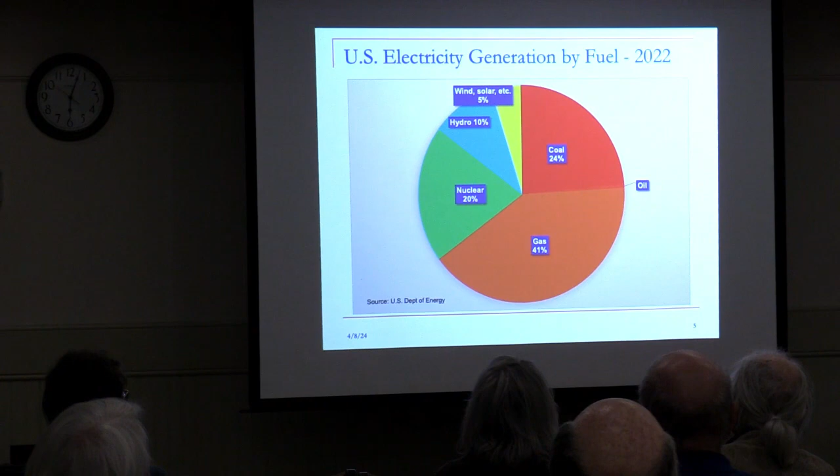First, how do we generate our electricity today? This is how. 24% of our electricity is from coal, 41% natural gas, a tiny fraction from oil. So fossil fuels are still the majority of our generation. It's down about 3% in the past 10 years or so, and renewables are up a couple of percent, with hydro, as is usually the case, being the leading renewable, and wind and solar, so that totals 15%, and nuclear is steady at 20%.

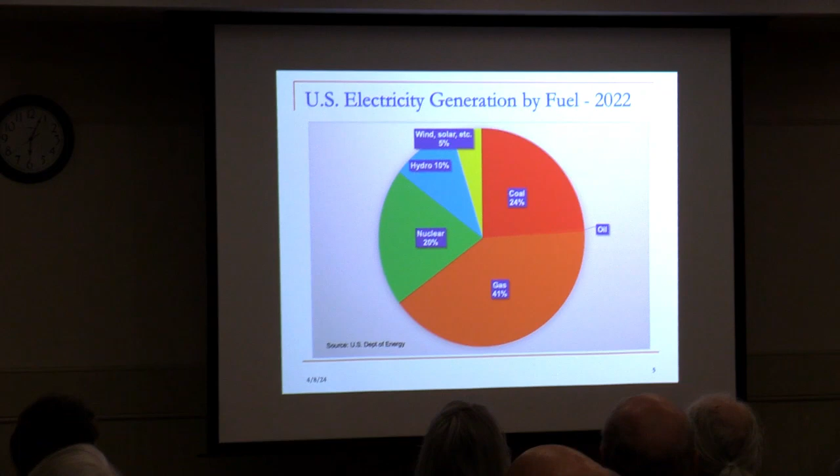So there hasn't been much change except a large movement from coal to natural gas over the past 10, 15 years, which is good for the environment. Not necessarily done for that reason, by the way. Natural gas powered power plants are cheaper and easier to build, and natural gas has been declining in price for some time, but it's still good for the environment.

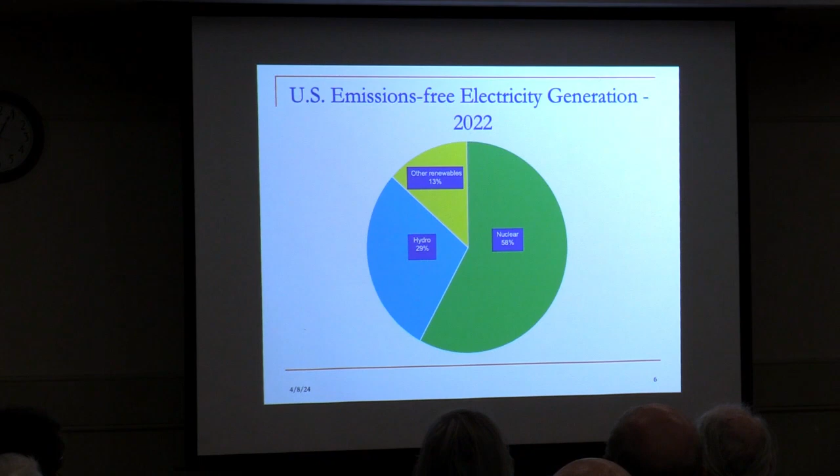Of the ones that we just looked at, these are the ones contributing to emissions-free electricity, which is what we're interested in from the standpoint of mitigating global heating. I don't call it warming because it's really heating. Most of our emissions-free electricity is from nuclear power, 58%. And then you see the other numbers there: hydro, 29%, and the other renewables, 13%.

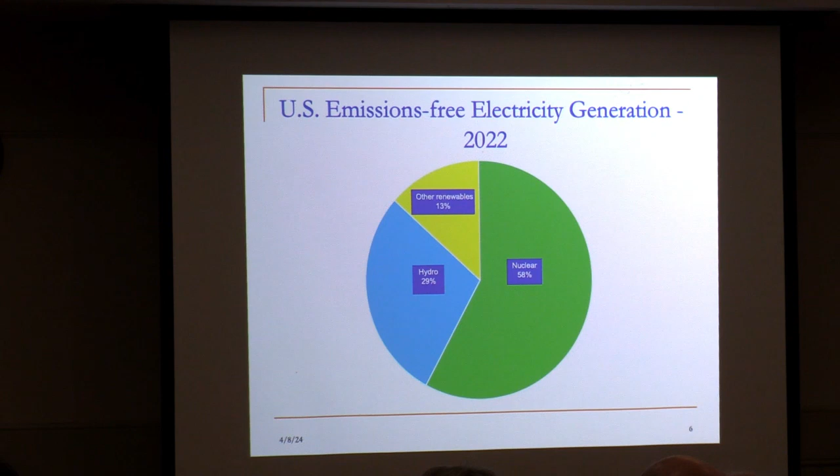That's something you need to keep in mind when we talk about nuclear power. You throw away nuclear power, you throw away the biggest source of emissions-free electricity.

We have put 2 new nuclear plants on of the advanced passively safe types in the past 2 years, but none are planned that I'm aware of.

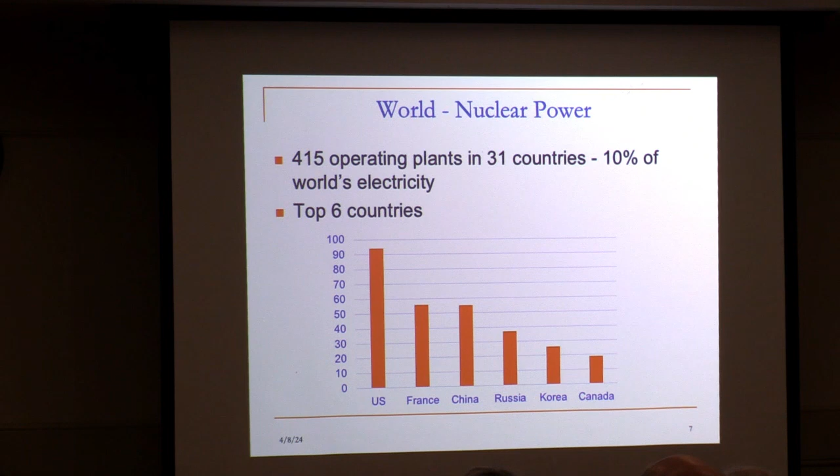So why should we consider nuclear? My main reason is because it's the brightest hope for mitigating the electrical generation emissions that contribute to climate change.

In my view, and I've been involved in this for the past 15, 20 years, informally, global heating is an existential threat. And I don't mean an existential threat through the re-election of politicians. I mean, really, it's a problem.

There was an article in the paper last year, I think, that pointed out that 4 of the 5 planetary extinctions of all life were caused by global heating. In that case, it was the emissions from volcanoes which caused the heating, and when that happens, various chemical reactions happen, and the seawater becomes saturated with sulfur dioxide instead of oxygen, and it all goes downhill for those of us who are there.

So that isn't anywhere near, but all of those extinctions happened after the CO2 level reached 900 parts per million. It's currently over 400, and at the rate it's rising, it'll be less than 200 years to reach 900. Doesn't mean we'll have a planetary extinction, but it does mean it's more serious than probably most people have realized.

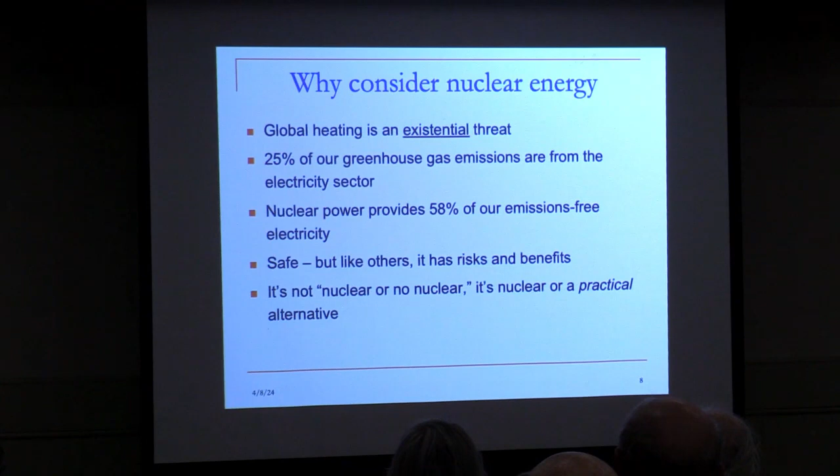One thing to keep in mind, it's not nuclear or no nuclear. No nukes is a choice. It doesn't just stop there. What do you use?

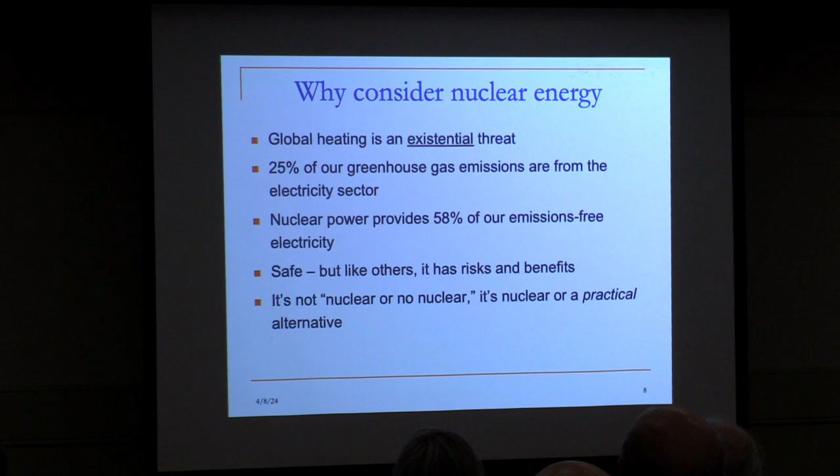Here is the start of the safety argument. Hope you can read this, but let me bring it down.

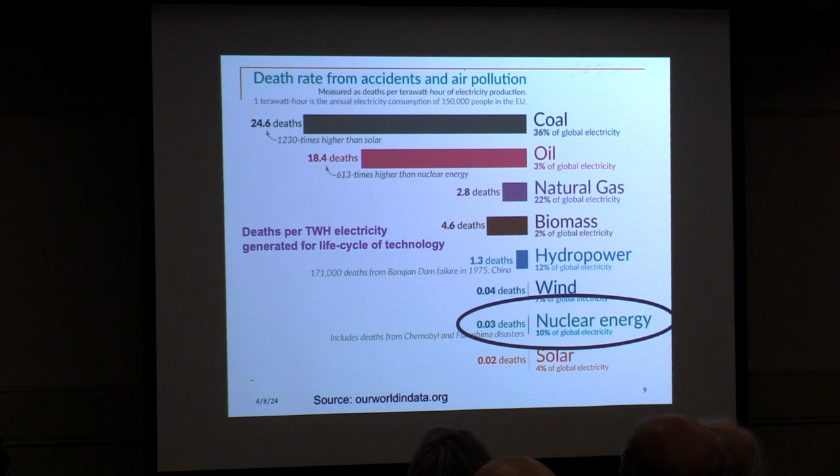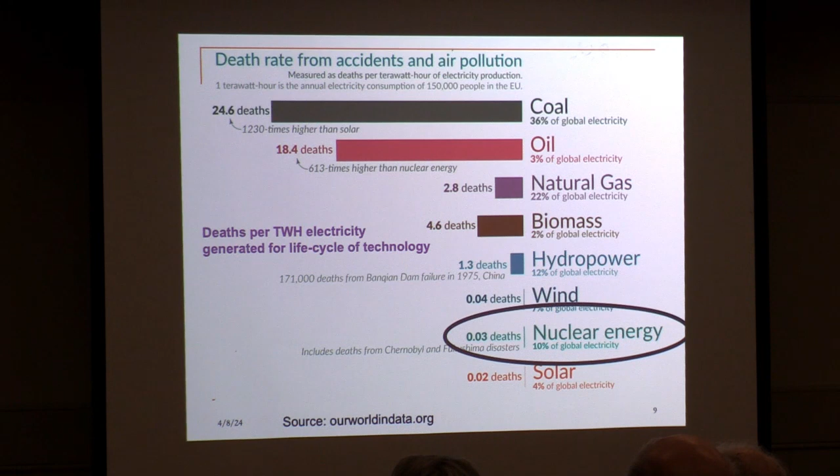This is a EU study that determined the death rate from accidents and air pollution for the whole fuel cycle, from mining through operation of these various technologies. No surprise, coal is the most dangerous at 24.6 deaths per terawatt hour, that's 1 billion kilowatt hours generated, which is the annual electricity consumption of 150,000 people in the EU. That's how they chose to measure this.

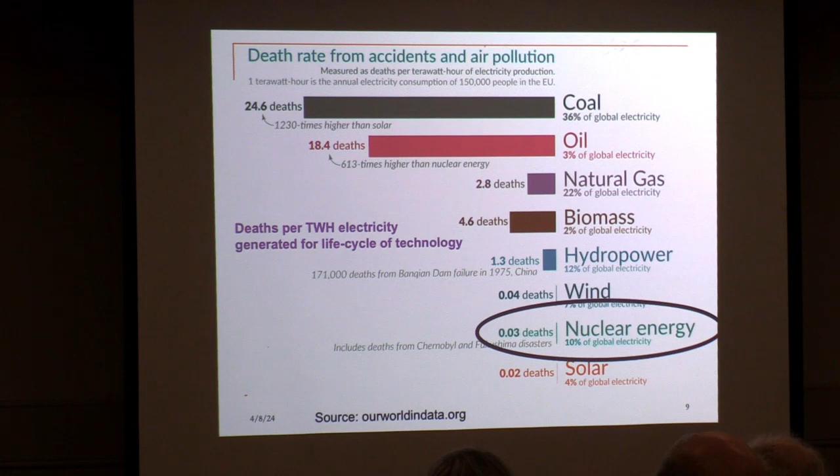Oil also up there, natural gas is much lower. Hydropower, wind, nuclear, and solar are in the category of emissions free, and of those, wind, nuclear, and solar are very close and minuscule in impact.

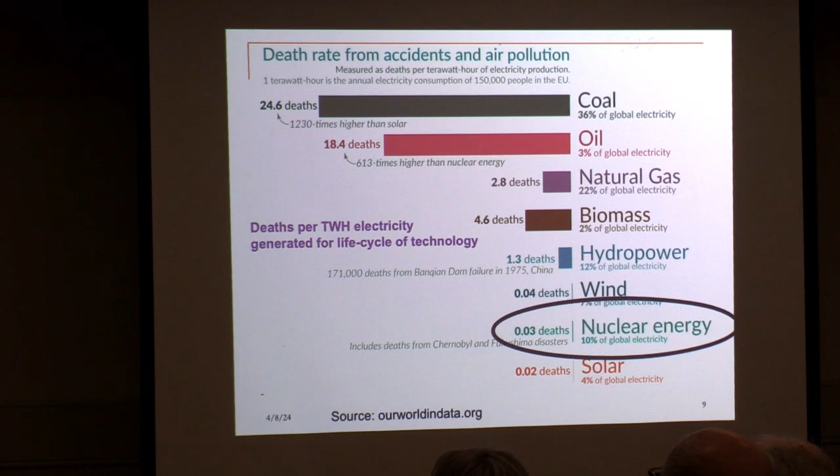This includes any deaths from Fukushima or Chernobyl. There were no deaths from 3 Mile Island, and I'll get into those accidents, which we all know about, in a moment.

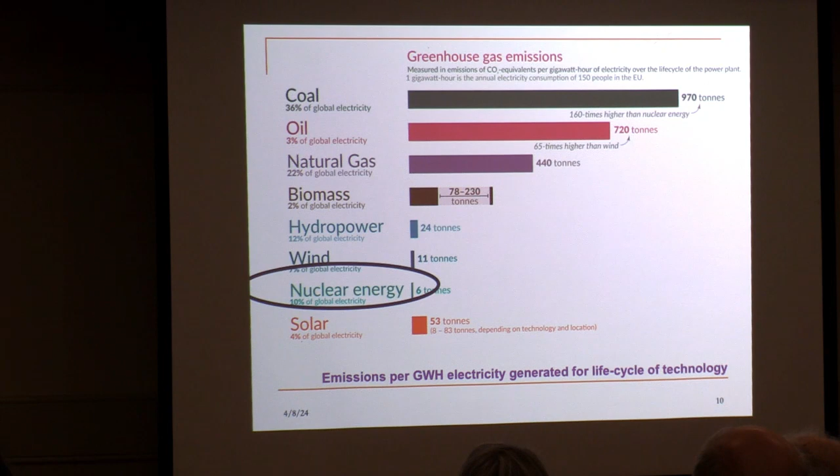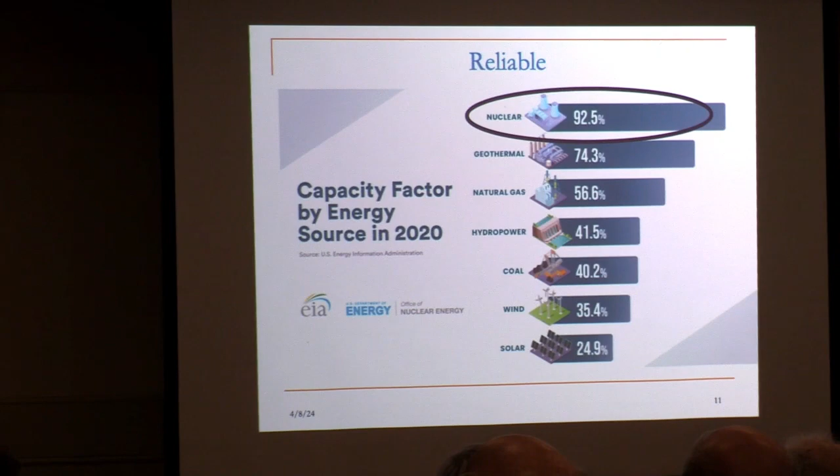It wasn't always that way, but over the years we figured out how to get it right, and so 92.5% is good. Then you can read the other numbers? Yes, okay, so I won't go through them all.

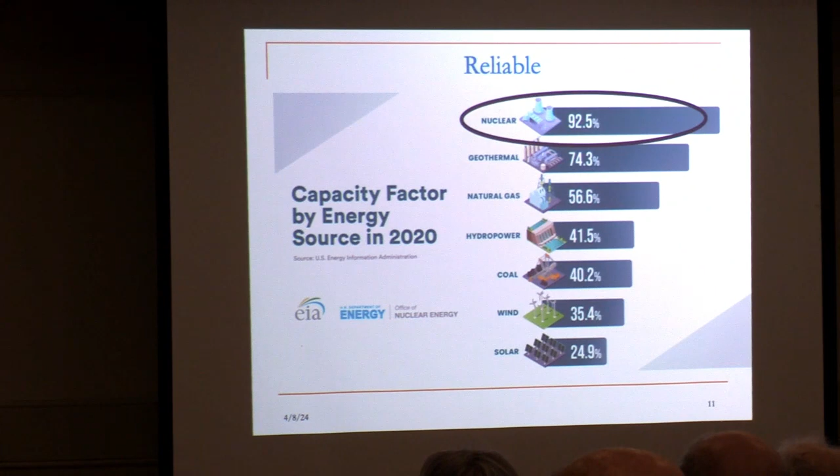But one thing we have to note is wind and solar, because wind doesn't blow all the time and it gets dark part of the time, they have a relatively low capacity factor. What that means is, when someone tells you they've just installed 90 megawatts of wind capacity off East Hampton, think 30, because it's only operating at a 35% capacity factor if it makes the average.

And it only lasts 20, 25 years, whereas nuclear plants last 60 years or more. So it's very difficult to make economic comparisons between these power sources, and I haven't done that in this presentation. It's really apples and watermelons. But it's worth noting that reliability is important.

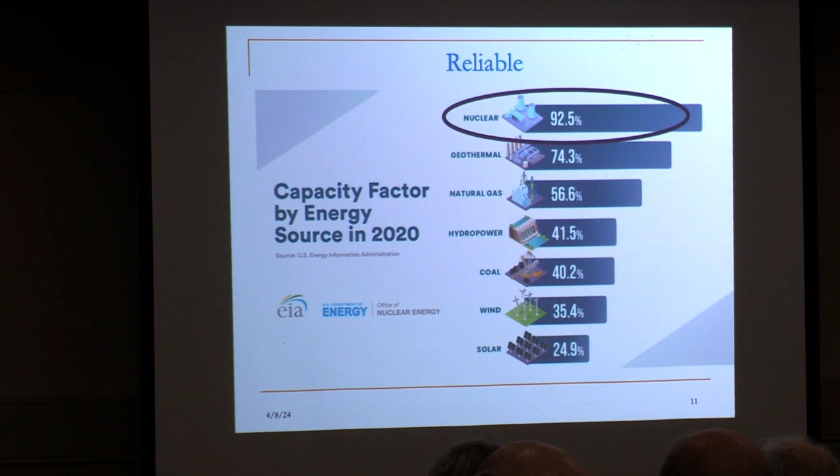So why don't we just use solar and wind instead of nuclear? Nobody likes nuclear, that isn't true, of course, because 57% of the people polled last year in the US wanted to see more nuclear plants. Surprise.

Anyway, the reason we can't rely on solar and wind is because they are potentially unavailable when they're needed. The other sources, fossil fuels, nuclear, are what the utilities call dispatchable. So when we need more input to the grid to meet demand, the guy who handles that in the transmission department calls the right plants up and says, jack up your power level, because demand is going up. And they can do it.

Whereas wind power and solar power are a function of Mother Nature. She decides when you can do that. And the result is it's not necessarily available when it's needed.

So what we do now in that situation is the dispatcher gets backup power from fossil fuels. So if I'm going to build a wind farm or a solar farm, I have to have backup available already. That isn't counted in the price, but it has to be there, otherwise we don't have electricity when we need it.

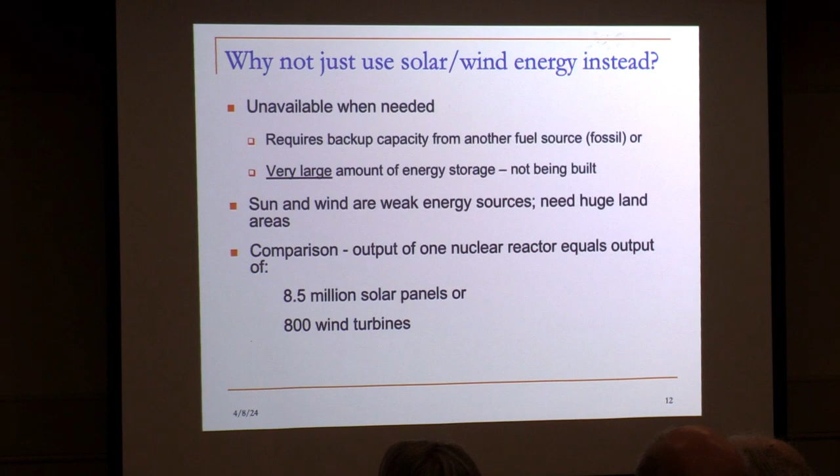Or if you build either of the renewables, a big farm so to speak, you need a very large amount of energy storage, prohibitively large. And we don't have energy storage built into these plants.

I had an experience here on the sustainability committee where I asked the salesman from South Fork Wind, several years ago, they have battery storage, and I said, what is your energy storage capacity? He never answered.

They say they have 90 megawatts of battery storage. What they don't tell you is megawatts is not a measure of storage, it's megawatt hours. So for how long will the battery last? A few seconds, minutes? Those batteries are designed to level the production. So if you get a gust of wind or it falls off or whatever, the battery will kick in for a few seconds, maybe a few minutes. It'll hold the output steady.

When I worked on a coal plant in Louisiana, I think the state law there was you had to have 30 days of coal storage. Dirty as hell, but it was there in case for some reason traffic on the Mississippi stopped and you didn't get your coal barge down when you needed it.

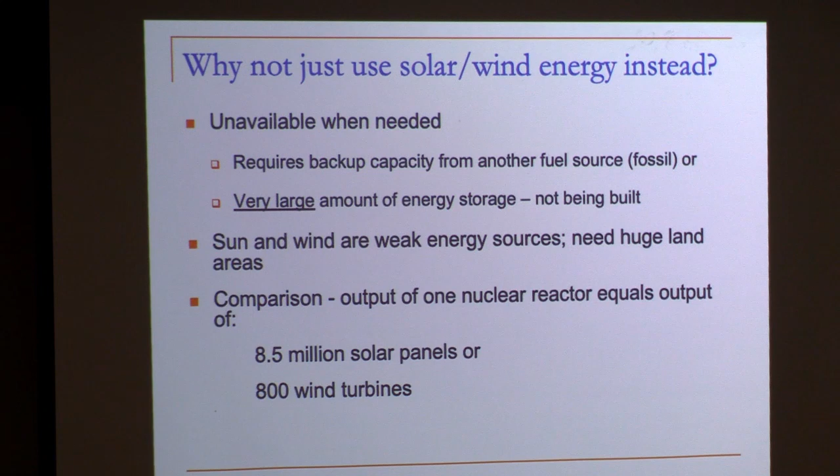So, one of the sources of power, as we know, is nuclear power. So how does it work? This will be short. Here is a famous reactor site, which happens to be on an island in a river in Pennsylvania. Which nuclear site do you suppose that is? That's Three Mile Island, where the accident happened in 1979.

It is typical. I've shown the cylindrical concrete buildings—there are two units on that site, and those are the reactor containment buildings. In a moment I'll tell you schematically what's inside them. Other buildings—let's see if this works—that building is where the turbine generator and the machinery that supplies the electricity is located. These are all backup structures.

These two towers, which everyone sees most prominently, are not just for nuclear plants—all new plants generally have those cooling towers. They're to cool, take the waste heat out from the steam cycle. There's no radioactivity coming out of or going into those facilities, but they're very prominent, everyone sees them.

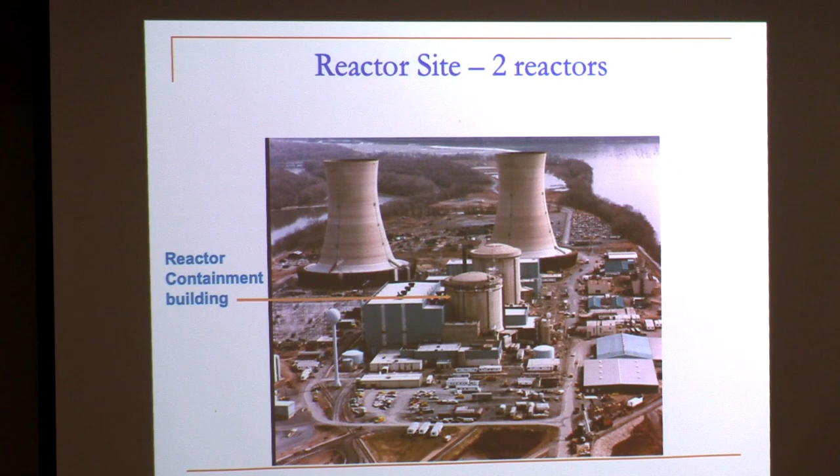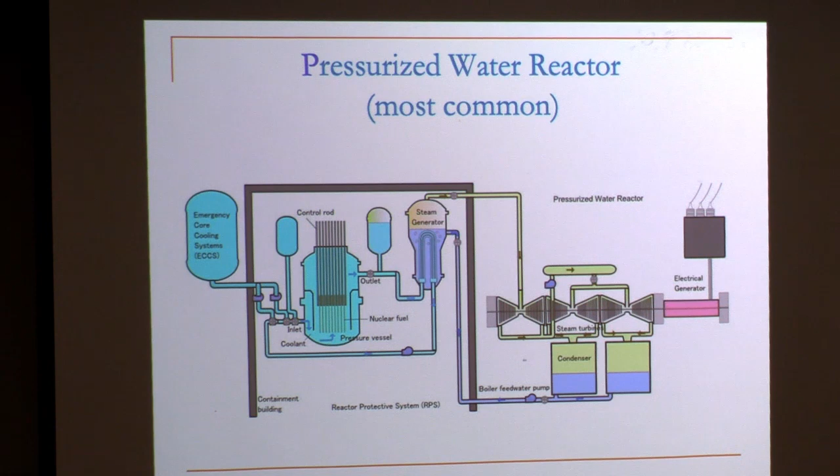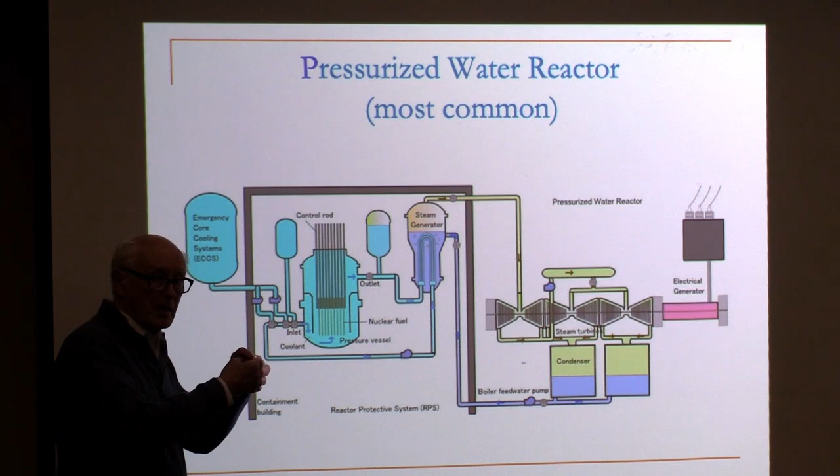Inside the reactor containment building—I'll walk away from the microphone—here's the fuel. There are about 20 million fuel pellets, made of ceramic. Inside them is the fuel. They are stacked in fuel rods, just slightly bigger than the pellets, and that's what generates the heat. Fission of the uranium oxide in those fuel pellets generates the nuclear heat.

The way it's removed from the reactor and eventually ends up in the turbine generator is high pressure water, 2,250 pounds per square inch, 600 degrees. This water, because it's under high pressure, is circulated through the reactor, then through tubes in what's called a steam generator. On the other side of the tubes is regular water. The heat from the tubes boils the water, creates steam, which goes into the turbine generator, runs the turbine and runs the generator. That generates the electricity.

In principle, it's very simple. In practice, of course, the most complicated part of the plant is generally this part. But the one that people worry about the most, since accidents involve radiation, is this one.

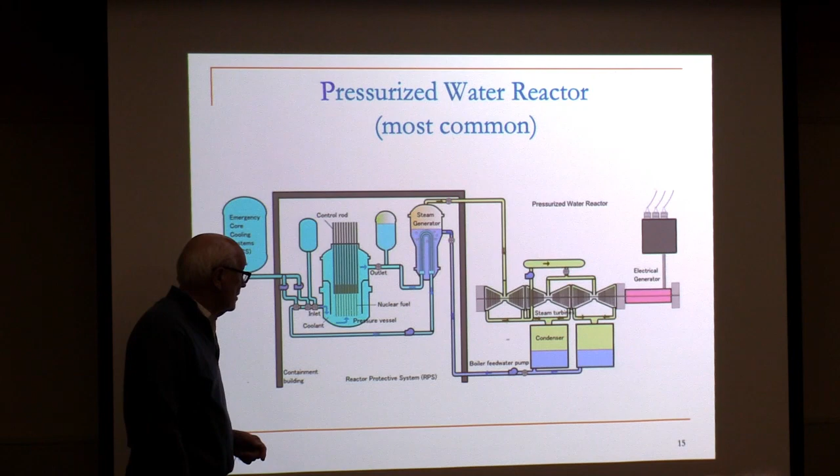So that's how it works in simple terms, but it is fundamentally simple. The fission boils the water, creates the steam, which goes through the turbine, and we generate electricity with it. The risks of nuclear power have to do with radiation.

These are some facts of which you're probably aware. Radiation occurs naturally—it's generated by radioactive decay in uranium, which is found in the earth, and it comes down from the sun in the form of cosmic rays. We get about 360 millirem per year from natural causes, part of which includes medical x-rays and things like that, which also give you radiation.

The radiation, if it's too much, or if it gets to the wrong places—like if you breathe in a radioactive isotope such as plutonium—can be dangerous. You can hold plutonium in your hand and it won't hurt you, but if it oxidizes and becomes dust, then you breathe it in, your lung tissues are so sensitive it can cause, probably would cause, cancer. The same is true if you ingest radioactive isotopes—your insides are sensitive to that, and you're more likely to develop cancer, not from a direct dose to the outside of your body, but from the inside.

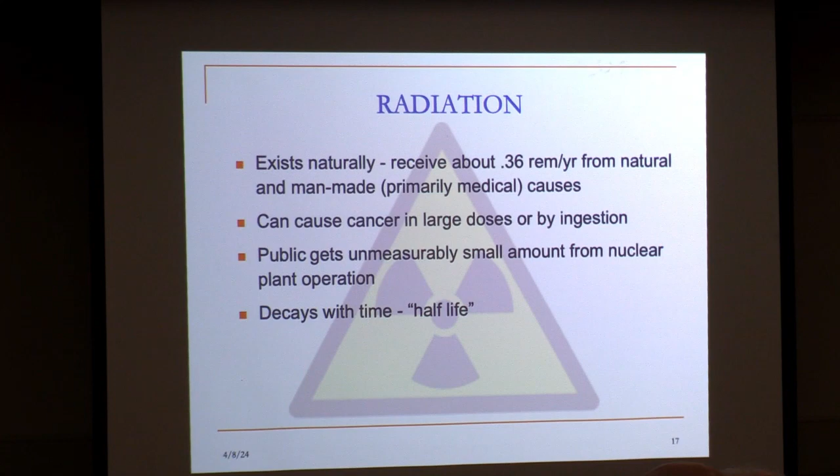We don't see any difference in radiation-caused cancers between Denver and New York, even though Denver has about twice the natural radiation because it's higher in elevation. Some people have concluded—I met one years ago in Japan, a scientist—that they support the hormesis theory, which is that a small amount of radiation is actually good for you because it stimulates your natural immune system response. I don't know whether it's true or not, but these people are not stupid. It would seem to be supported in my mind by the fact that variations in naturally occurring radiation up to a certain point don't seem to be reflected in cancer data.

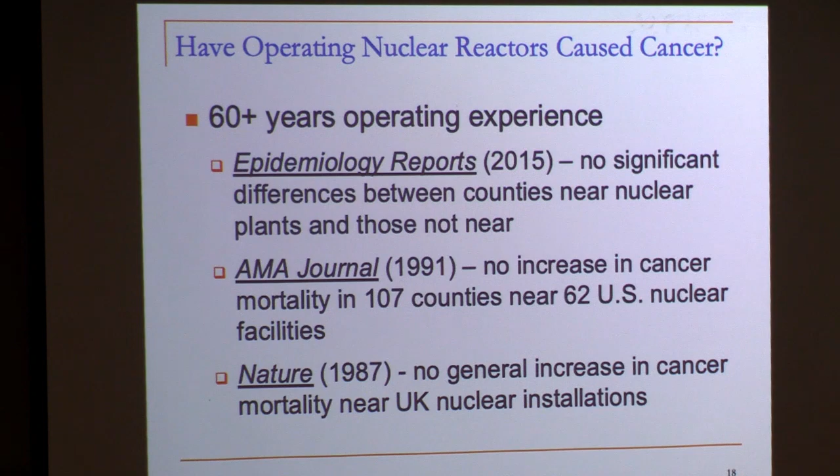But importantly, how have we done in the nuclear industry protecting our workers and the outside people from radiation? The latest study I found was 2015, but there may be others. It takes years to do an epidemiology study because you need not only the dose rates in given areas, but the cancer incidence. You put those two together, commonly using adjacent counties—you pick a county where there's a nuclear power plant, and compare the cancer rate in that county with adjacent counties, which are basically the same environmentally, except they don't have a nuclear power plant.

What those reports have shown—and there are always some cases where the data was a little off, but we think it's because of something unrelated to the nuclear power plant—is that they all show consistently no increase in cancers in those areas where you have nuclear power plants. To me, that's particularly important.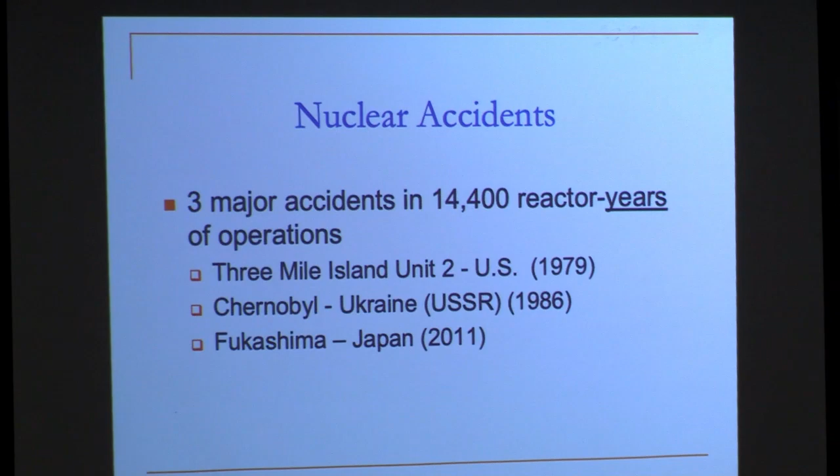So let's talk about nuclear accidents. The first major one was Three Mile Island in 1979. I was there after the accident as part of the recovery team, so I know something about it. I was there for several weeks and accumulated no radiation, according to my dosimeter.

But this was a bad accident, not just because it wrecked the plant and disrupted many people's lives, but because it was caused by the operators. A relief valve lifted due to a series of mistakes made on the steam plant side. The load the reactor was supplying—it was at 97% power at that time—was immediately shut off. The reactor has inertia, so even though the proper controls worked, it kept generating power for a while, and the pressure lifted a relief valve in the pressurizer, which was on another tank, and the valve didn't reseat.

The operators didn't know that it had stayed open—they could have known, but it wasn't made easy for them in the control system. So primary coolant was discharged for a couple of hours into the reactor building basement, and eventually overflowed into the auxiliary building. Because the operators didn't know what was going on, they shut down a key automatic system that would have kept water in the reactor. So it all happened not the way it was supposed to happen.

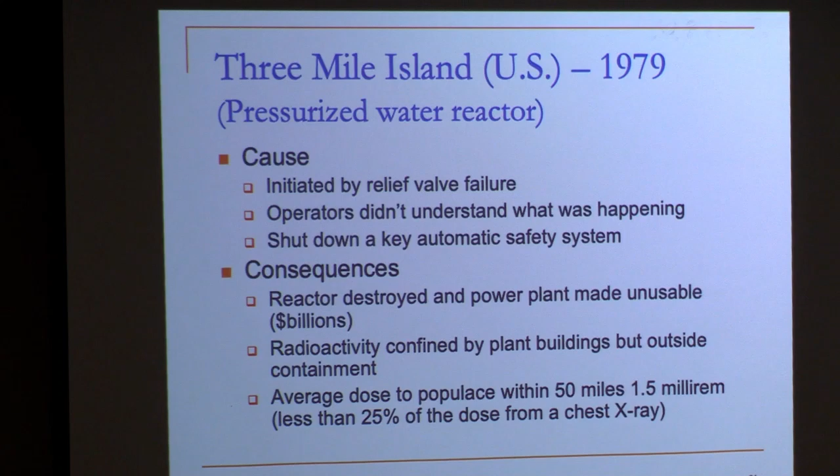And so that can't happen again. You don't want to deal with the aftermath.

The public was protected by what we call defense in depth, which is redundant safety systems, redundant inspections, etc. It worked mainly because we had a containment building, which is the ultimate barrier between radiation released and the public. I think that's important when we come to the next accident I'm going to tell you about.

It was a wake-up call to the industry and to the Nuclear Regulatory Commission. Big changes were made. Now every nuclear plant has to have a full-scale simulator, which is a giant electronic mock-up of the control room, so operators can practice. They're fed scenarios like 'this is happening, this is happening' and asked what do you do. It's great training.

There was a new industry oversight organization formed. It wasn't government, it was formed by the utilities. It was called the Institute of Nuclear Power Operations, and it was staffed by very experienced people, primarily former submarine commanders. Most of our reactors are in the naval nuclear propulsion forces, powering aircraft carriers and submarines. I worked there for 15 years, was responsible for the 688 class submarines and the little submarine. Those guys are good, and they don't have any profit motive.

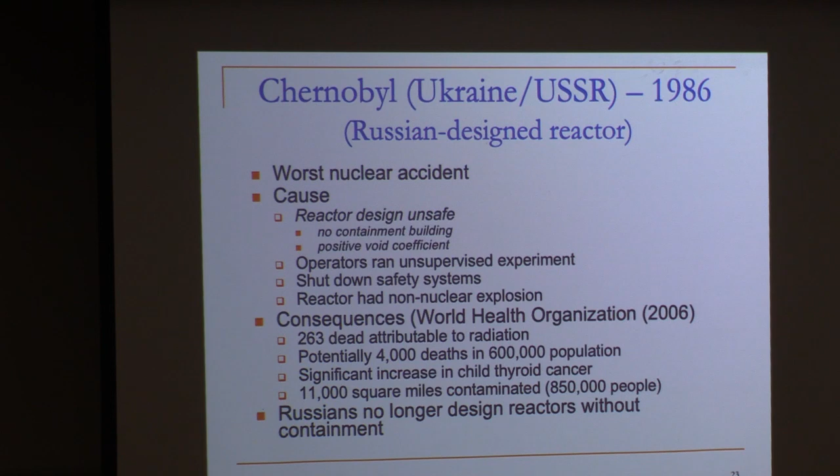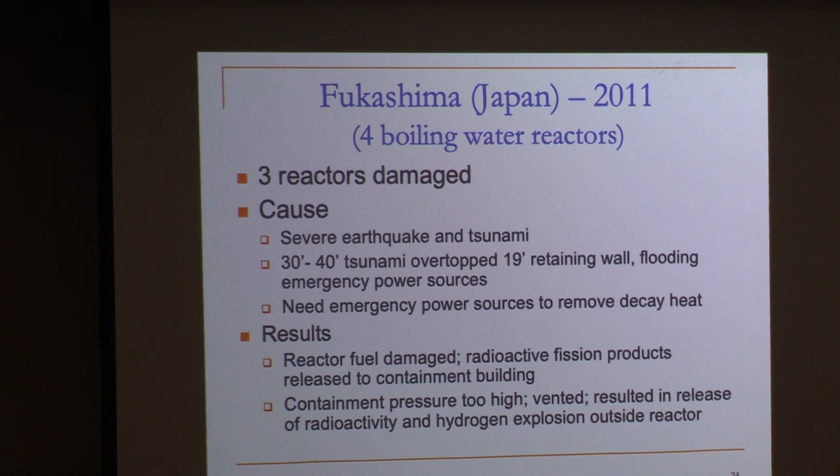There was a severe earthquake, a different cause. The earthquake didn't harm the reactor, as best anyone can tell. What did, of course, was the tsunami that happened as a result of the earthquake offshore. The tsunami was twice as high as the retaining wall designed to protect the reactor site from such an event. When the tsunami topped the retaining wall, it also destroyed the emergency power sources.

Backing up a little bit, when the earthquake happened, all of the electricity sources in Fukushima and that whole area went down. The reactor automatically scrammed, but all their other power sources too, the transmission lines were out, etc. So the only source of emergency power to remove what's called decay heat from the reactor, which means that when the reactor shuts down, it's still generating some heat from radioactive decay of what's in the reactor fuel. That decays to essentially nothing, but it takes weeks for that to happen.

So all reactors of that type, all reactors except the kind I'm just going to mention, need auxiliary power to keep them safe. That's why they all have at least 2 diesel generators designed to provide that power. But when the tidal wave came over the wall, the water went into the basement, which is where the diesel generators were. That was the safest place for them from the standpoint of an earthquake, but from the standpoint of flooding, it was the worst possible place. So they had no emergency power.

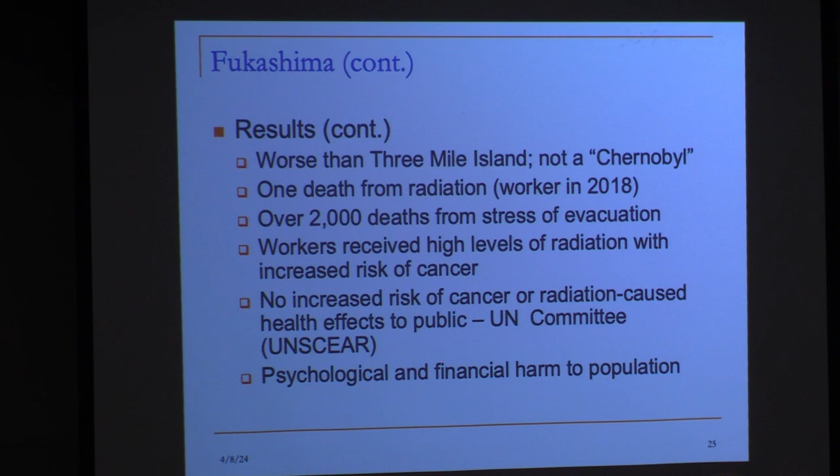The workers received a high level of radiation, but as I said, that was 7 years ago so far, and only 1 person has died. The UN Scientific Committee on the Effects of Atomic Radiation concluded from their studies that there's no increased risk of cancer, because the dose rates the public received were not high. But it was obviously a terrible thing that affects the whole area today.

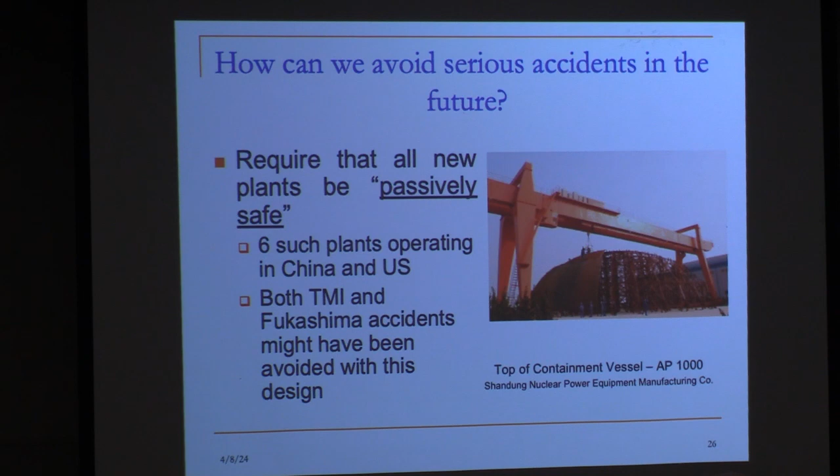So how do we not do this again? That's 3 accidents in thousands of reactor-years of operation. In a normal industrial setting, that's a sterling safety record, but given the potential impact on the surroundings, that's not sterling enough.

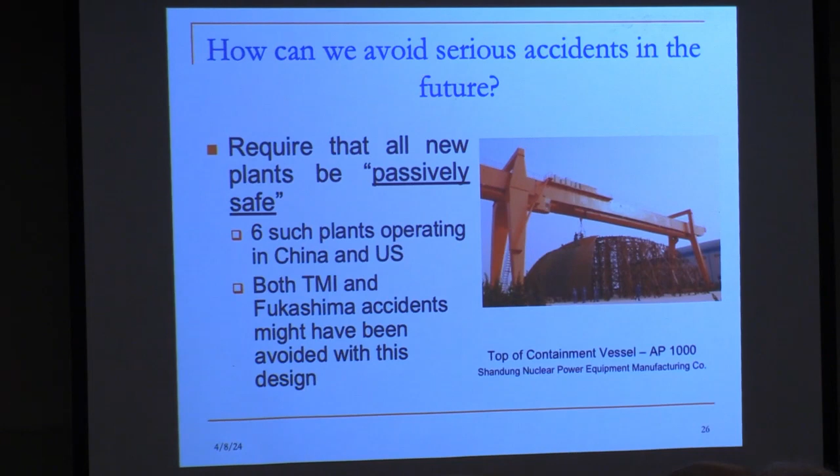So what the nuclear industry started doing years ago was design reactors that didn't need emergency power after they shut down. They have natural circulation, valves that fail open, and a big tank of water on the roof of the containment building, which cools and boils, and the heat is removed all without the use of electricity. So for 72 hours after an accident like that happens, you don't have to do anything, but at the end of 72 hours you have to fill the tank, which is literally on the roof of the containment building. This is called a passively safe reactor.

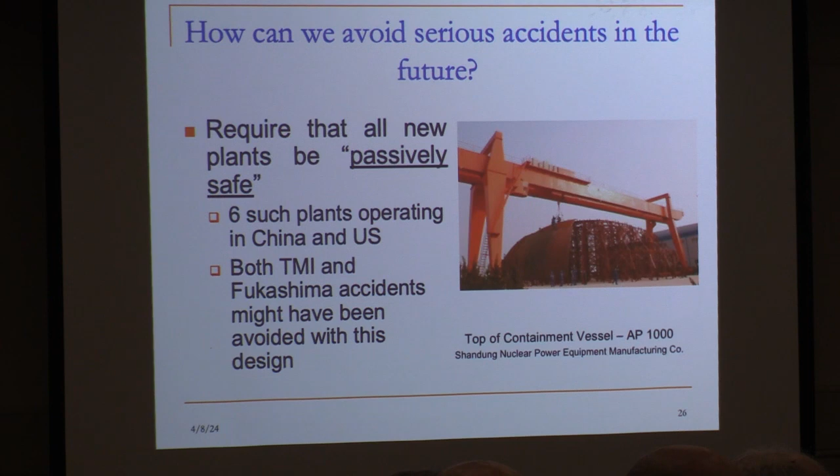In my view, both the TMI and Fukushima accidents could have been avoided if this type of reactor design were used. It is being used now. The latest 2 reactors brought online in this country, and 4 recently brought online in China, are all of this design. However, I don't think there's any requirement that it be done. I can't see anything else being built in this country other than a passively safe reactor. I don't know about the Chinese, and they're building more than anybody.

So I think we could have avoided the accidents. There's no question that the Achilles heel of the earlier nuclear power plant designs is this need for a backup source of electricity. For example, Shoreham had 5 diesel generators, it was probably going to be the safest reactor in the country. But anyway, enough on that.

How are we doing? This is the last topic. Everyone's favorite.

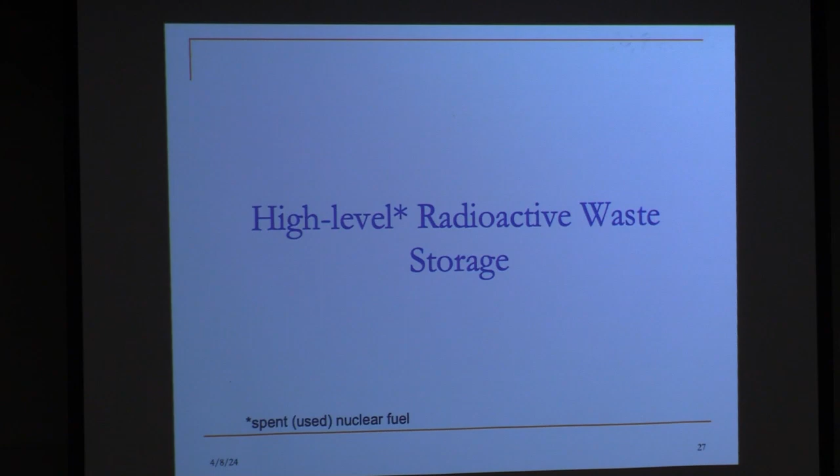Spent nuclear fuel is what high-level waste is. That's basically the definition of it.

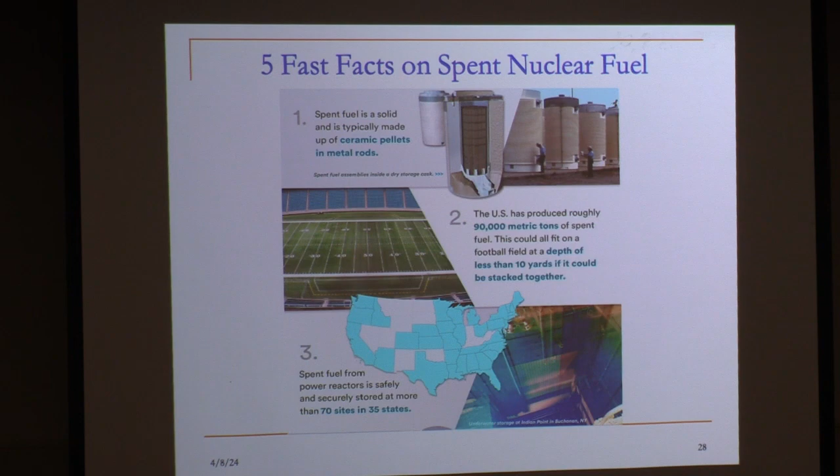The NRC has told us they're good for 120 years, and that's probably a lot longer. This is where the radioactive waste is now stored, at each power plant or nuclear facility. Is it safe? Yeah, I think it's a lot safer than burying it myself. It is stored that way, and that's the plan for the foreseeable future.

Transportation is handled if it has to be transported, say, to another site. It's in this monstrous thing, which we'll probably show. Those big discs on either end are compression-absorbing discs. They travel mainly by train. If there were to be a train accident, the analyses show these casks would be just fine. Whatever they hit would not be.

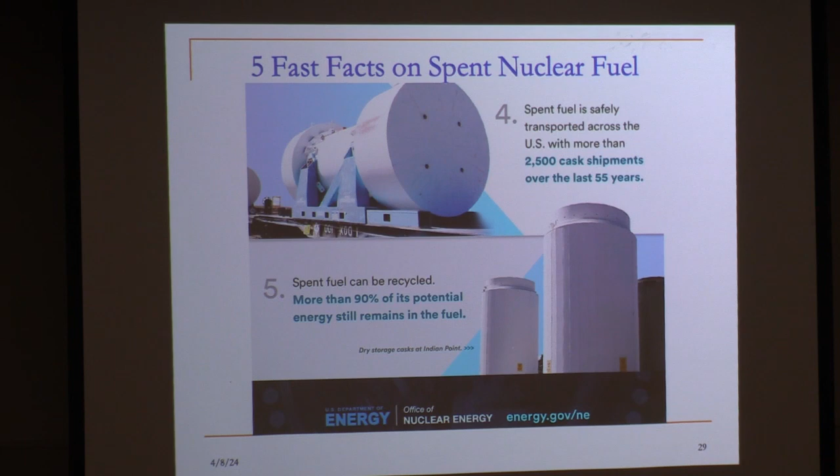One final fact about radioactive waste, which is very important: the spent fuel in those casks has 90% of its usable fuel still there. When the reactor fuel is spent, so to speak, that means there are enough nuclear poisons, neutron absorbers that don't fission, created in the fuel that you can't make the reactor go critical anymore. Also, in the fission process, the neutrons don't all go to creating a chain reaction. Many of them end up being absorbed by uranium-238, creating plutonium-239.

A third of the energy supplied by a reactor is from the plutonium generated by the reactor itself. There's a lot of that plutonium left, and it's perfectly fissionable. The Europeans, for example, right now use what's called mixed oxide fuel, not in all their reactors, but in many. It's a mixture of plutonium oxide and uranium oxide.

They recycle, reprocess chemically their spent fuel, remove the plutonium, and make new fuel with it. You can burn that in existing reactors, and therefore you don't have to store it for tens of thousands of years. You destroy it usefully, getting 200 times as much energy from the original uranium than you would otherwise. So this is important from both the standpoint of energy efficiency in use of uranium and waste disposal.

The problem with waste disposal is long-term, long half-life isotopes like plutonium. The fission products that are in spent fuel have an average 30-year half-life. I once testified to Congress on a program designed to take advantage of this. I told the senator that if you remove the plutonium, what's left, the fission products, can either be used for medical or other uses, or they can be buried. In about 300 or 400 years, they will have decayed to more or less background.

Now, Southampton is 300 and some years old. So are we saying that's too difficult? No, it's not too difficult. But if you say to someone, I'm going to store the plutonium underground for 10,000 years—which wouldn't even be enough to make it background, by the way—I would be the first person to raise my hand and say that's nonsense. We can't do that.

However, recycling the fuel requires that there is some free plutonium in the process. It's available. President Carter, back when he was president, canceled the program because his staff urged him to think of it as a proliferation threat. The rest of the world doesn't think of it that way—the rest of the world thinks of it as an energy source.

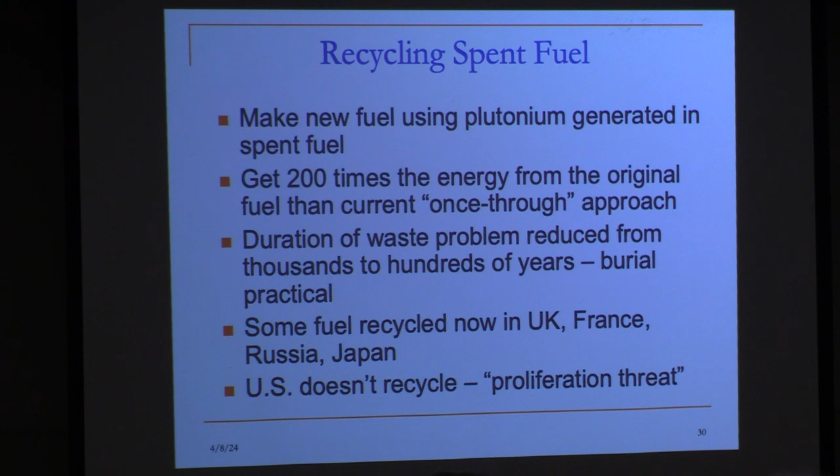So what have we done? In 1987, we were ordered to bury the spent nuclear fuel at Yucca Mountain in Nevada. Through 2000 and beyond, we spent $10 to $13 billion. Not finished, but it was being licensed by the NRC. Then in 2009, in the midst of a very difficult election for Senator Harry Reid, his mentor and the majority leader in the Senate, President Obama abruptly withdrew the application to Yucca Mountain and ordered a blue ribbon panel to look at it. They did, of course, what all blue ribbon panels do—they had a bunch of generalized recommendations, which have accomplished nothing. And we're back where we started.

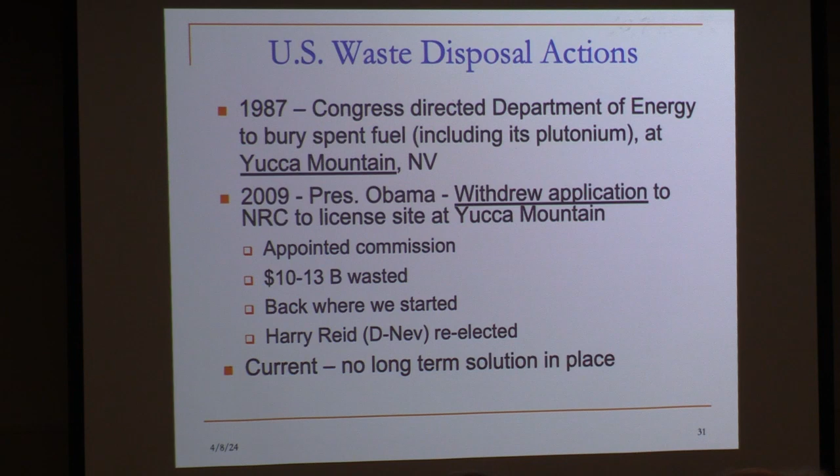Fortunately, where we are storing it, as I pointed out earlier, is safe—it's safe for decades yet. We've got time to figure it out, and hopefully time to get people in charge who have the guts to make the right decisions. So currently, we don't have a long-term solution in place. Most of the rest of the world looks forward to eventual burial; Finland actually has come closest to having an operating burial site. But we have to get one. It's not an emergency, though—the emergency is climate change.

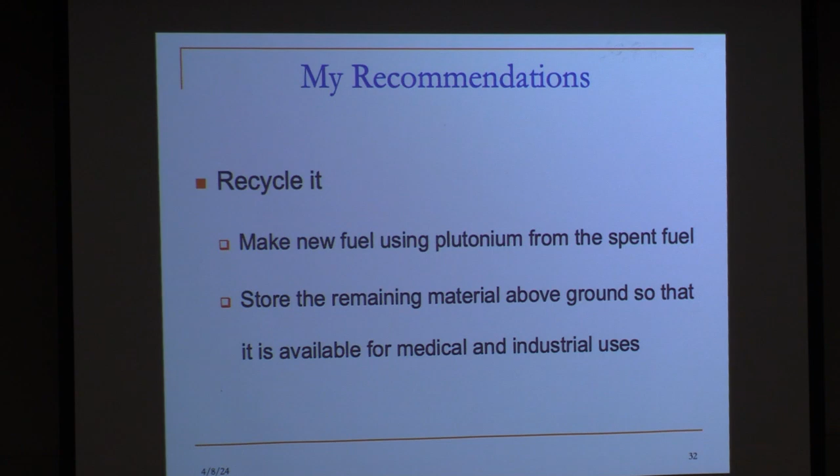So, as I say, my recommendation is to recycle it, do what the Europeans are doing, take advantage of the energy, store the remaining material above ground so that it's available for medical uses and other uses, which haven't even been thought about yet.

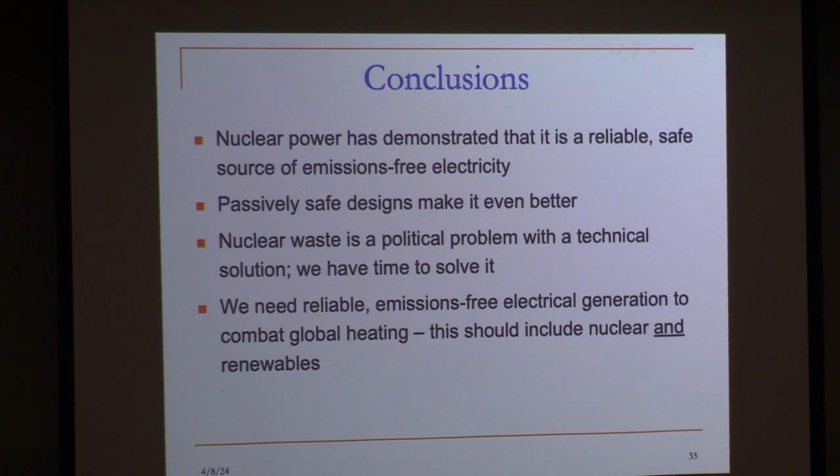In conclusion, I believe nuclear power has demonstrated that it is a safe, reliable source of emissions-free electricity. The passively safe designs that are currently available and being built make it even better. Nuclear waste is a political problem with a technical solution, and so we have time to convince people or find another solution. We need reliable, emissions-free electrical generation to combat global heating. This should include nuclear and renewables and any other brilliant idea that people come up with. The problem is doing it in an emissions-free way. If we know how to do it, let's get on.

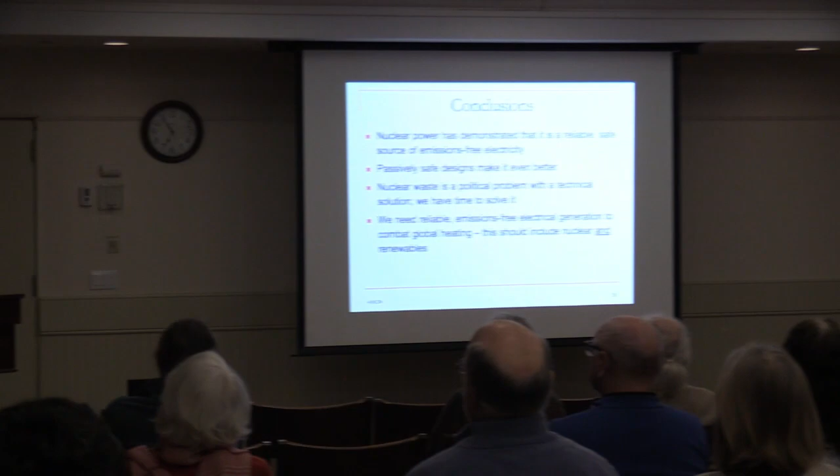New York State, NYSERDA, New York State Energy Research and Development Authority, they still don't quote battery storage in energy storage terms. I wrote them a letter, they ignored it. We are, I'm afraid, being a little bit hoodwinked here.

But nuclear power plants do cost too much and take too long to build here. In China, they build them in 6 years, same plant. So I think our problem is we need to look at just what kind of bureaucracy we've put in the way of building these plants.

The company I worked for 13 years, which was the architect engineer on 3 Mile Island, they were the architect engineer on the first commercial nuclear power plant of any size, Oyster Creek in New Jersey. Their contract, this is laughable, of course it was in the 60s, but still, was $5 million. They lost their shirt on it, but I was responsible for 2 nuclear plant designs as the project manager for the same company. Our contracts would have been a couple $100 million, plus.